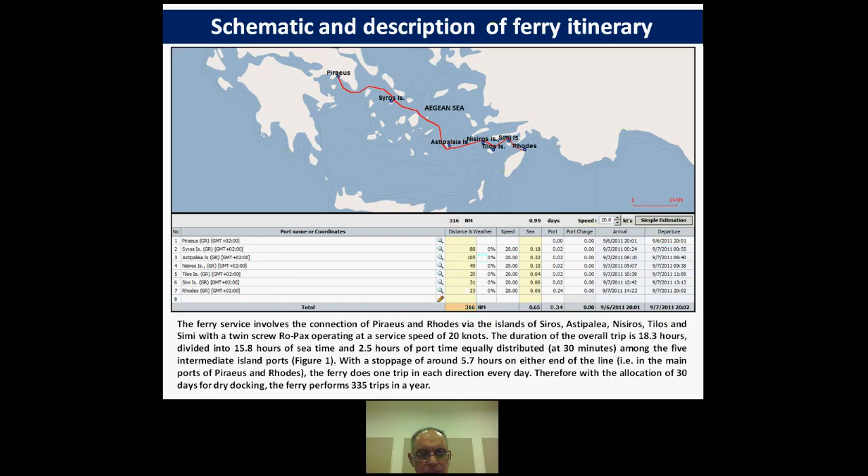The ROPAX employed in this operation has a service speed of 20 knots. The duration of the overall trip is 18.3 hours, which is divided in roughly 16 hours at sea time and 2.5 hours of port time, equally distributed, 30 minutes at each of the 5 intermediate ports, as shown in the figure above.

And it involves a stoppage time of nearly 5.7 hours on either of the end ports, meaning Piraeus and Rhodes, which we consider as the main ports involved in this line. The ferry does one trip in each direction every day. Therefore, with the allocation of 30 days for dry docking, the ferry performs 335 trips in a year.

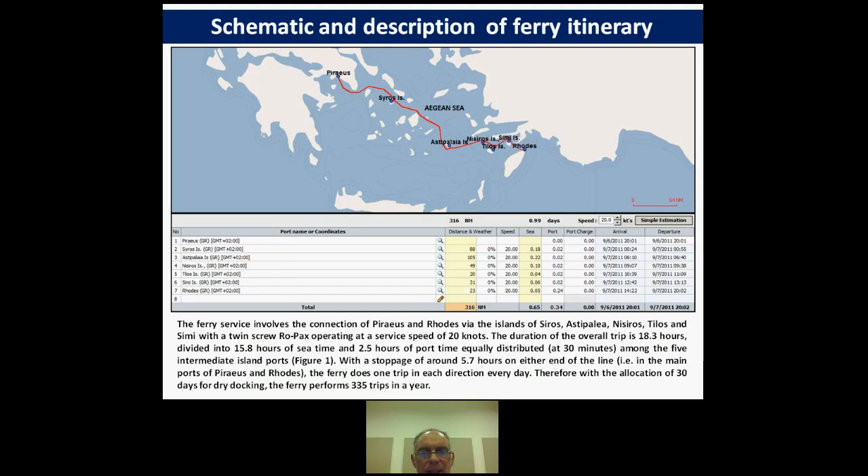With regard to the ferry characteristics, the ferry has a lot of features, technical and operational, but it might be important to state that we have a gross tonnage of around 10,000 tons, an overall length of 140 meters, a propulsion power requirement of 12,000 kilowatts with regard to the maximum continuous rating, which is shared by two propulsion engines. So we're talking in terms of having a twin screw vessel, as it is the case for all ROPAXes operating within the Greek coastal shipping network.

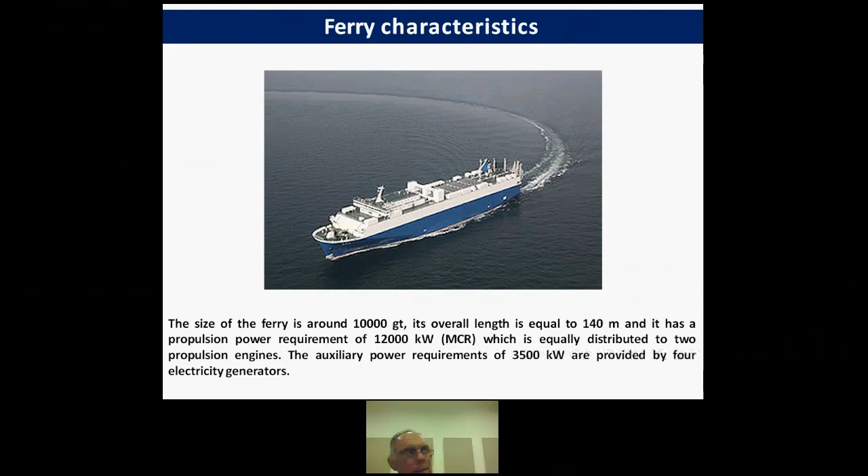This is a national regulation requirement. The auxiliary power requirements of 3500 kilowatts are provided by 4 electricity generators. These are the basic characteristics which are essential for the exercise, in other words, main engine sizing and auxiliary engine sizing. As it was mentioned in the previous presentation, an activity-based methodology for fuel cost estimation is chosen.

We split the fuel costs as those which the ROPAX will present during its operation at sea and in port. Okay, and to that extent we need a number of itineraries in order to have an annual estimation of the fuel costs. We need the trips per year.

We need also the time of operation of the main engine and the auxiliary engines, at sea and in port, which we will have to connect with specific fuel consumptions for the main engine and the auxiliary engines, as well as effective load factors for the engines, which is a combination of the percentage of time the main engine or the auxiliary engine, whether at sea or in port, operates at a specific load factor,

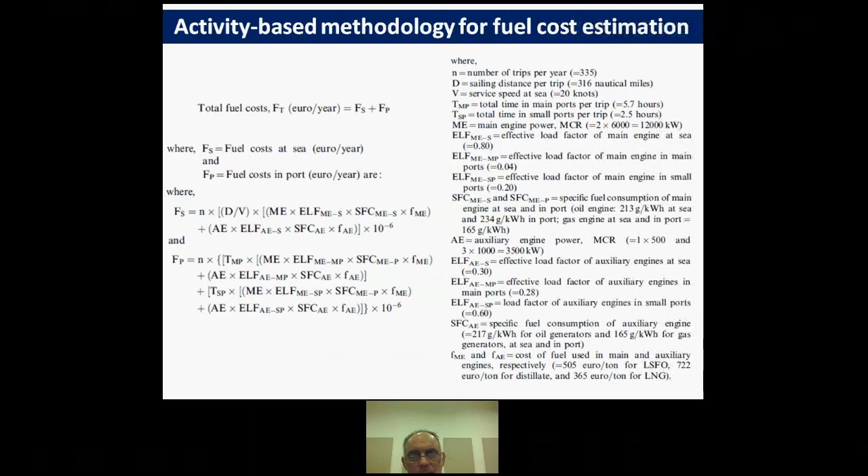together with the price of fuel, which we will have to distinguish between the fuel used for the main engines and the fuel used by the auxiliary engines. And here are all the assumptions with regard to this specific itinerary. Sailing distance per trip is around 316 nautical miles, which is a long distance, even within the framework of the Greek coastal shipping network. And we get some further details with regard to what assumptions are made.

Now, with regard to the fuel cost price, we're talking in terms of nearly 500 euros per ton for a low sulfur fuel oil operation and 722 euros per ton for distillate. And the price of natural gas is almost half of that of distillate. Now, as we're currently experiencing, these are not typical prices, but the difference between the price of oil and the price of natural gas remains more or less the same. So in absolute terms, we might encounter some variations with regard to what is happening today, but in terms of comparison, there's no great difference involved.

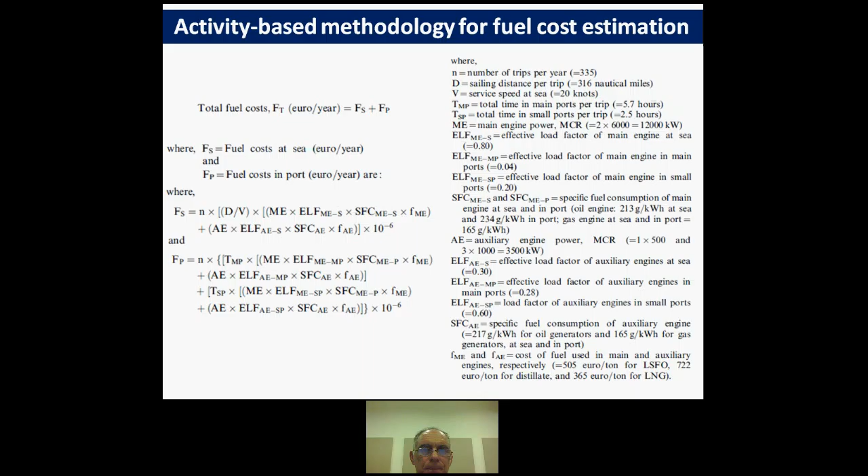Now, the benefits of the activity-based methodology are also utilized in order to estimate the air pollution cost of the service. Again, we separated between what we have at sea and what we get in port, because the damages are not the same whether you are away from a port or within a port, especially if that port presents some sizable human population. It is particularly vulnerable to exhaust emissions, and to be more specific, to particulate matter. And with regard to that, the assumptions we make are listed here on the right.

The emission factors, again, come from reliable sources from the literature. With regard to low sulfur operation, which this ship has to have, as it is a passenger ship operating on a regular basis between European ports, the conditions of reduced sulfur content apply. This is contrary to what was mentioned earlier today with regard to a ro-ro vessel, which belongs within the category of a freight vessel.

Also, we have to come up with external cost factors, and it is important to note again that we have a very high influence of the damages of particulate matter emissions, because of their impact upon the human population, pulmonary diseases and all the problems associated with their inhalation by human beings residing or having a presence within the ports of call of this service.

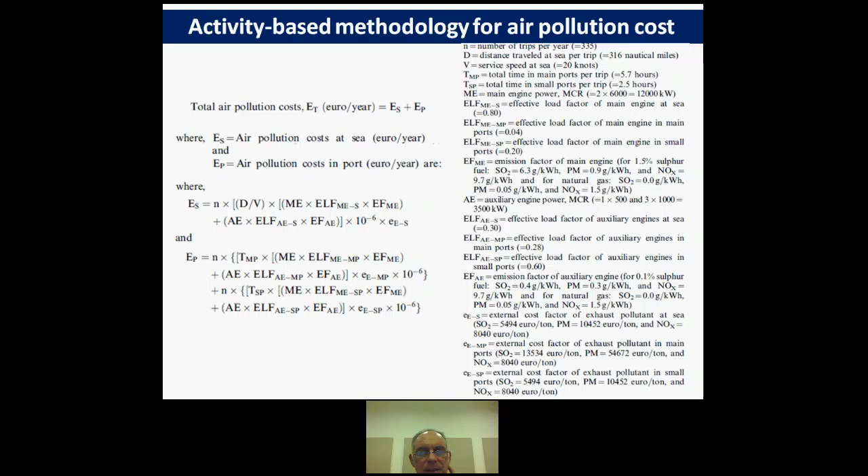Okay, so we do assume that the ROPAX operates, with regard to the fuel used by the main engines, on a fuel oil which has a maximum sulfur content of 1.5%. And then with regard to marine diesel oil, which is usually employed in diesel electricity generators, the sulfur goes down to 0.1%,

which is more or less a desulfurized fuel, and for that reason we have reduced emissions of sulfur dioxide and particulate matter, because these two, as was mentioned earlier in the day, are very much related, in comparison to the emissions of the fuel of 1.5% sulfur. As you can see, the difference is quite significant. Assuming all other emissions with regard to NOx and CO2 are unchanged and are irrelevant to the sulfur content.

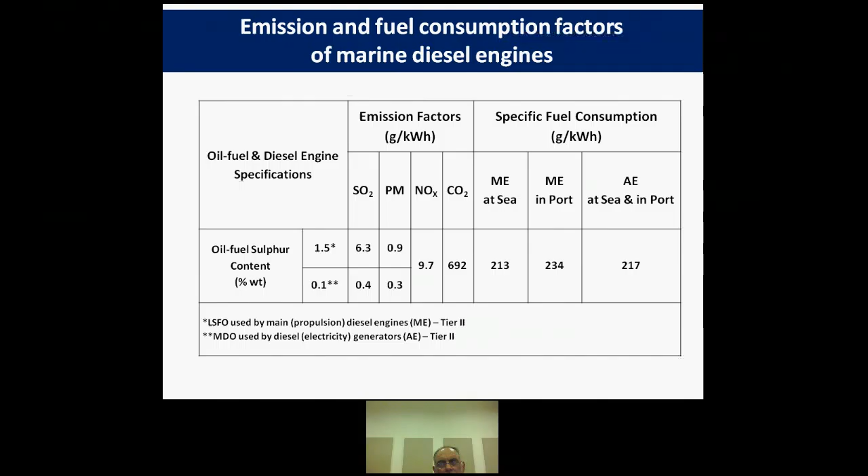With regard to the engine effective load factors, the engines operate at a certain load factor. When at sea, we are operating around 75%. In this case, it is assumed it is 80% with regard to MCR of the main engine power for 100% of the time. So an effective load factor of 0.8, we have this estimation.

Similarly, when we are at sea, with regard to the electricity generator, we operate at 30% of its power for 100% of the time, which gives us an effective load factor for the engine of 0.3. In main ports, as it's always the case with activity-based exercises, we have to consider that we're having an approach phase, a maneuvering phase and a berthing phase.

And we have a load factor of 0% for 80% of the time with regard to main engine in ports, but we also recognize that for 20% of the time the main engines will operate at 20%. It gives us an overall engine effective load factor of 0.04.

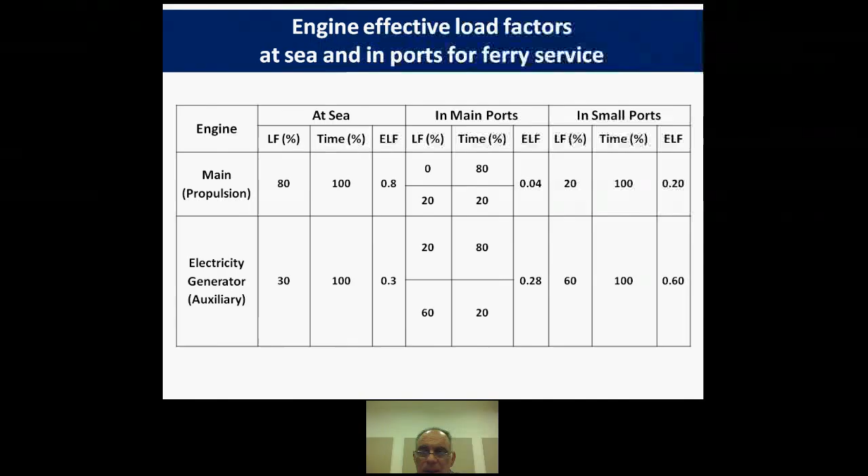But the same might apply to a certain extent to the diesel generators, as opposed to what is happening in the intermediate ports, where we still have to carry on operating and supporting the ferry in terms of its main engine operation and auxiliary engine operation for the short period of time we are spending in the small ports during this itinerary.

Now, with regard to the unit cost of exhaust pollutants, fuel and shipboard power technology, this is important because for our assessment of how the oil fuel operation compares to the LNG operation, we need to have unit costs for the air pollution, for fuel costs, and also for technical costs.

And as you can see, there is a clear division in the unit cost of SO2 and PM, sulfur dioxide and particulate matter. Whether we operate at sea or in small ports, we consider the impact to be more or less similar. But in the case of main ports like Piraeus and Rhodes, because of the presence of human population, we can see that the increase in the unit cost of particulate matter,

moving from being at sea or in small ports to main ports like Piraeus and Rhodes, is fivefold, 5 times more, whereas with regard to SO2, we have something like a doubling of the cost. In other words, it increases by 100%, a bit more, whereas with regard to NOx, which has an effect which is not very critical to human health, it is more or less equal.

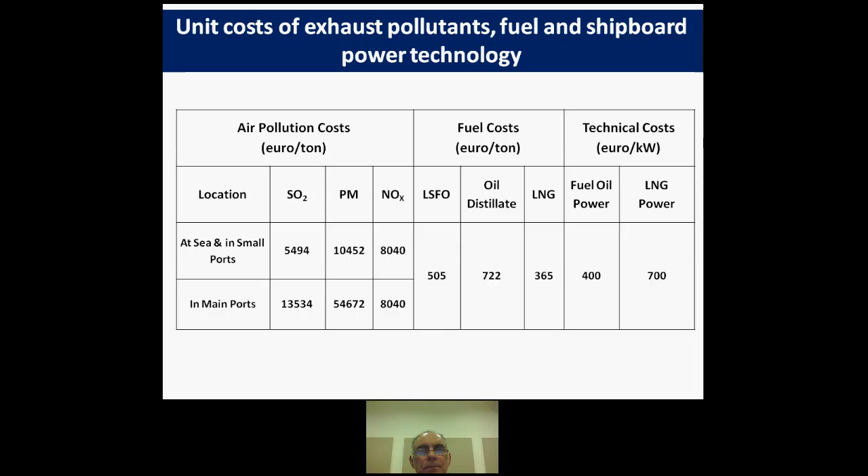Now, the fuel costs of the oil and LNG fueled ferry service on an annual basis in million euros: we can see that the total cost of the oil ferry is more or less double that of the LNG ferry in terms of fuel cost. And this is equally distributed between operating at sea and in ports. Yes, we'd expect that.

So, okay, although it looks like in ports the improvement is about 10% better. In other words, 48% reduction in fuel cost due to LNG use at sea and 58% in ports. Okay, but overall, we're around 50%, as I said, more or less half of the fuel expenditure when operating with an LNG ferry.

Exhaust pollution costs, when we look at SO2 here and NOx. The benefits here are overwhelmingly high. We have massive reductions at sea and in ports, and overall we are moving around 90% reduction in air pollution costs, and this is very, very important.

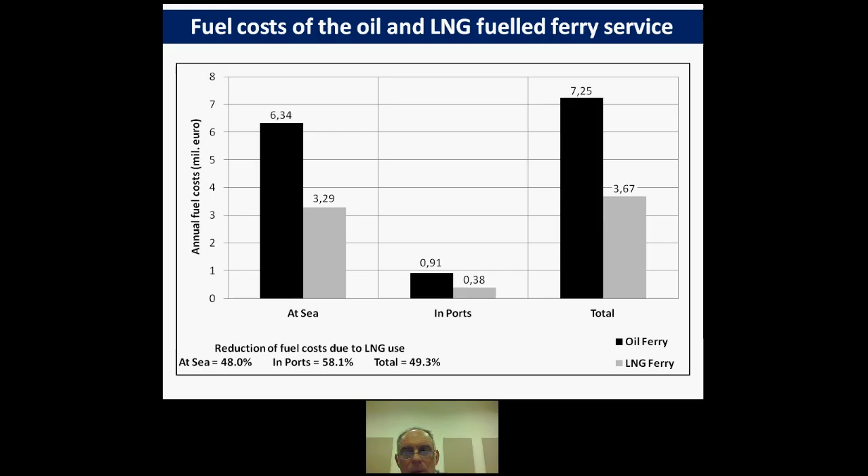Whereas in the case of LNG, okay, we might still have about 3.7 million euro expenditure in fuel costs, but we only have 800,000 euros in terms of air pollution damage on an annual basis.

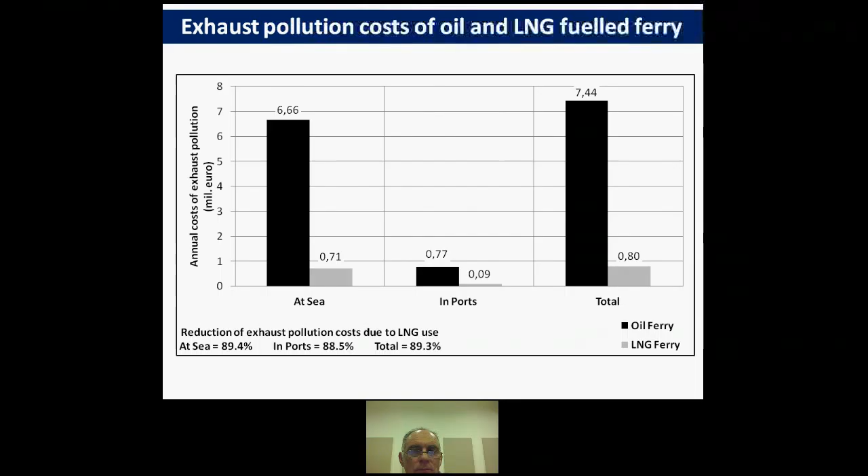In terms of an overall comparison of private, external and total costs of oil and LNG fueled ferry, as we can see, the oil ferry for 7.4, the external being 0.8, okay. Sorry, 7.4, 0.8 and minus 6.64 is the final improvement: 6.64 million euros is in favor of the LNG in terms of external costs, in terms of fuel costs, as well as technical costs. In other words, the purchase of the power system, capitalization costs of the power systems.

We're looking at something like 3.3 million euro reduction over the year, and the total, in other words, external and internal, or call it private in this case, costs, we'll see that the LNG ferry for this particular line operates favorably by almost 10 million a year when both, as I said, external and internal costs are considered, where with regard to internal we consider fuel costs and the power system.

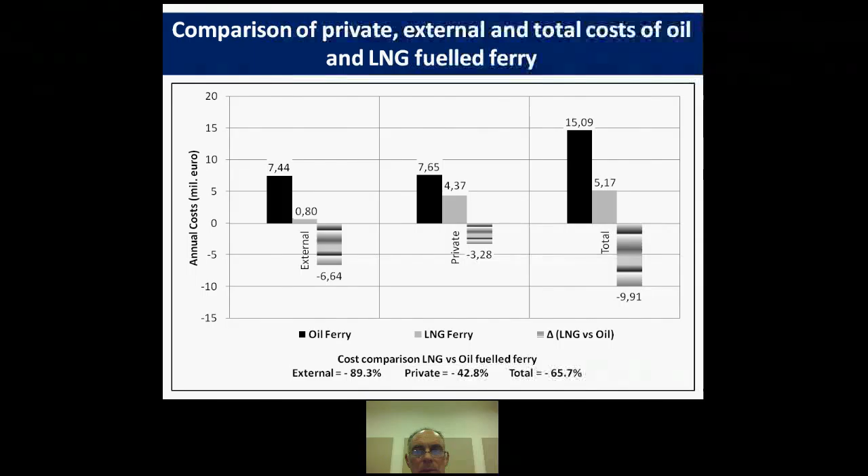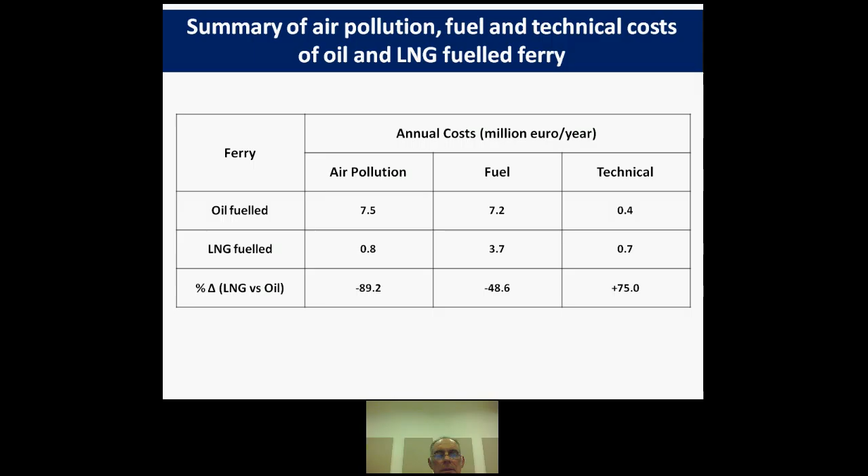Okay, so overall nearly 66% reduction in costs from moving from an oil fuel operation to an LNG fuel operation. Okay, air pollution, 90% advantage. Fuel cost, nearly 50% advantage. And with regard to technical costs, of course, we have an increase; the purchase and installation for this system is of the order of 75%, but overall the result is in favor of the LNG fueled ferry.

Now, knowing that we have volatility in bunker prices, it was considered appropriate to look at different scenarios with regard to the LNG, low sulfur fuel oil and marine diesel oil prices, assuming, of course, that the LNG price remains unchanged. Okay, we do know that there is some linkage between natural gas prices and petroleum prices, but any such variation between oil fuel prices and LNG can be accounted for by looking at a ratio of LNG to MDO prices and then LNG to low sulfur fuel oil prices.

Okay, which we can look at. Ranging from a scenario which gives us an LNG to MDO price ratio of 0.9 down to 0.45, like a 50% difference between scenario A and scenario E, and the LNG to LSFO, low sulfur fuel oil, ratio, which can range over a factor of 3. In other words, we have scenario A standing at an LNG to LSFO price ratio of 1.83 down to 0.61.